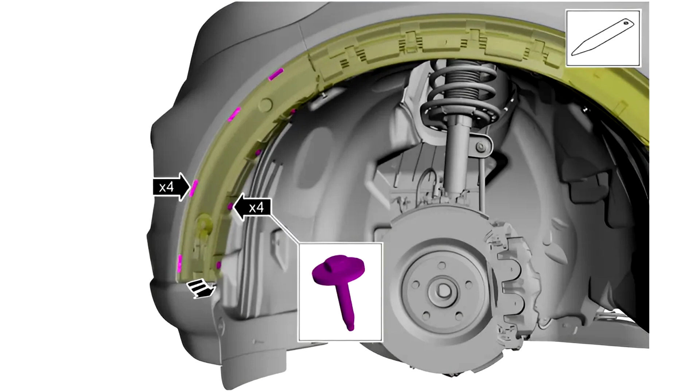Step 2. Remove the screws, detach the clips, and carefully move the front fender molding aside. Using an interior trim remover, repeat these steps on both sides of the vehicle. Step 3. Unplug the electrical connector for the front active park assist sensor. Repeat this step on both sides.

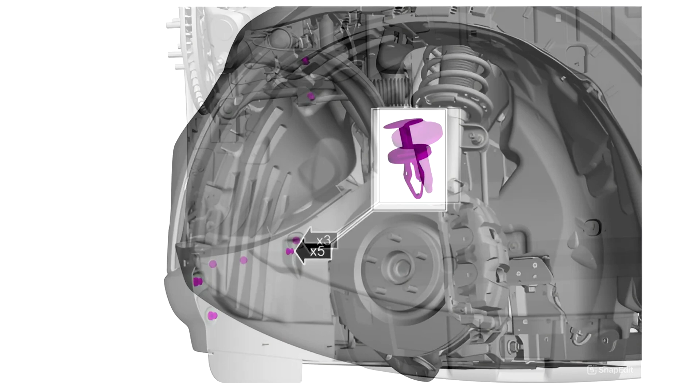Step 4. Take out the push pins securing the fender liners on each side. Step 5. Remove the screws as shown in the picture. Step 6. Move the front fender liner aside on both sides.

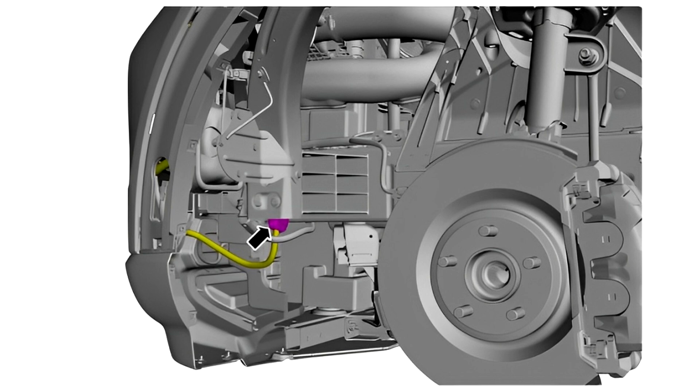Step 7. Disconnect the electrical connector from the front bumper cover harness. Step 8. 1. Disconnect the front bumper cover harness electrical connector. 2. Disconnect the front camera harness electrical connector. 3. Disconnect the washer hose.

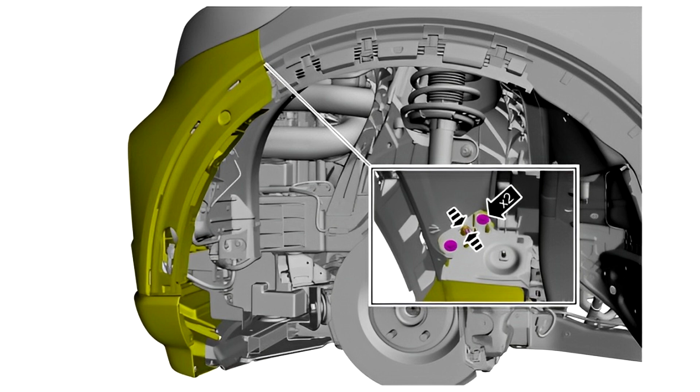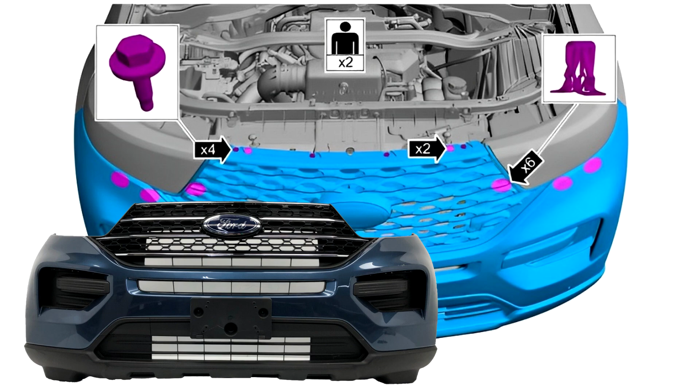Step 11. To reinstall the front bumper, follow the removal steps in reverse order. For vehicles equipped with 360-degree cameras, ensure these cameras are properly aligned. When replacing the front bumper cover, verify alignment of the front parking aid and active park assist sensors. If any sensor does not pass the alignment check, perform a diagnostic procedure to identify the issue.